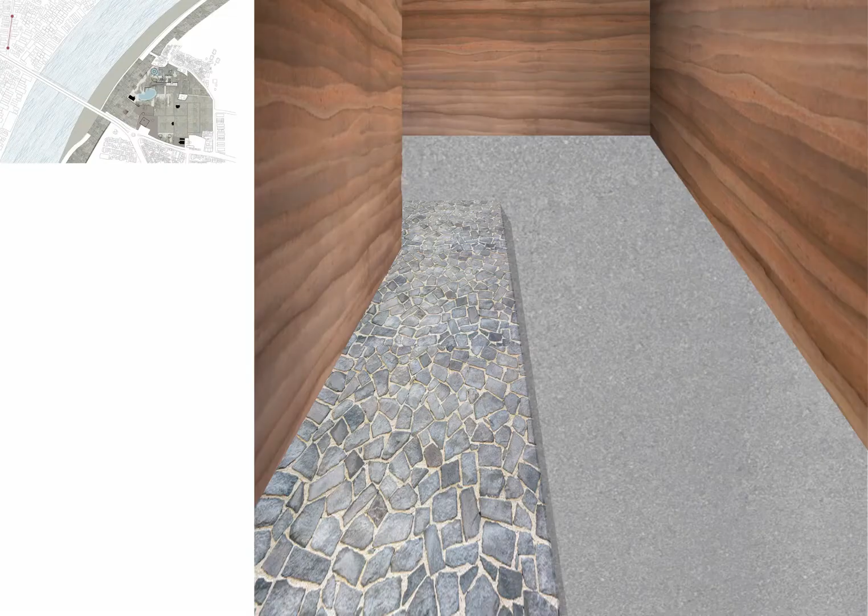After over 15 years spent traveling for my job, I decide to take a break and return to the city for good. While a lot has changed, it is great to be home with my son. After a few days of rest, I decide to accompany him for his daily morning walk and picking up fresh vegetables for the day. Between tall compound walls, he jogs along a narrow path while I take my time walking slowly.

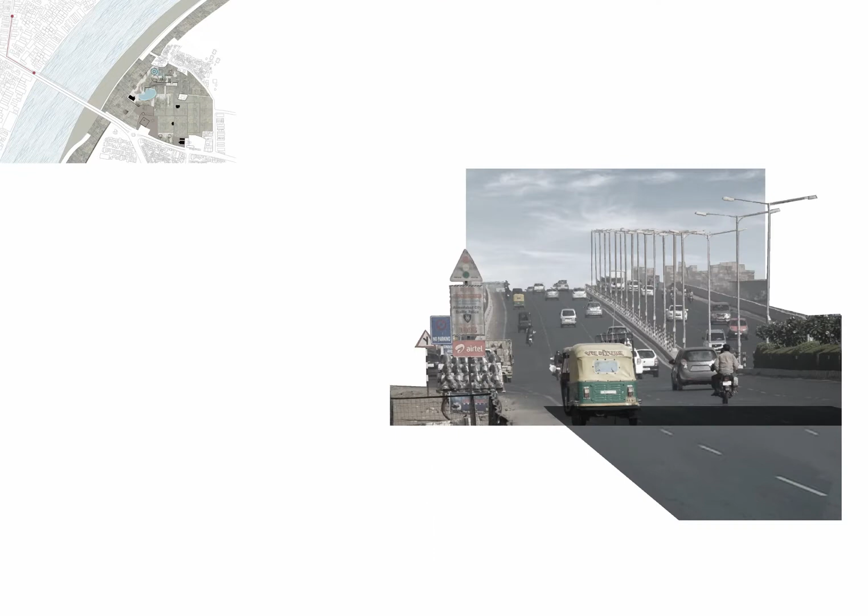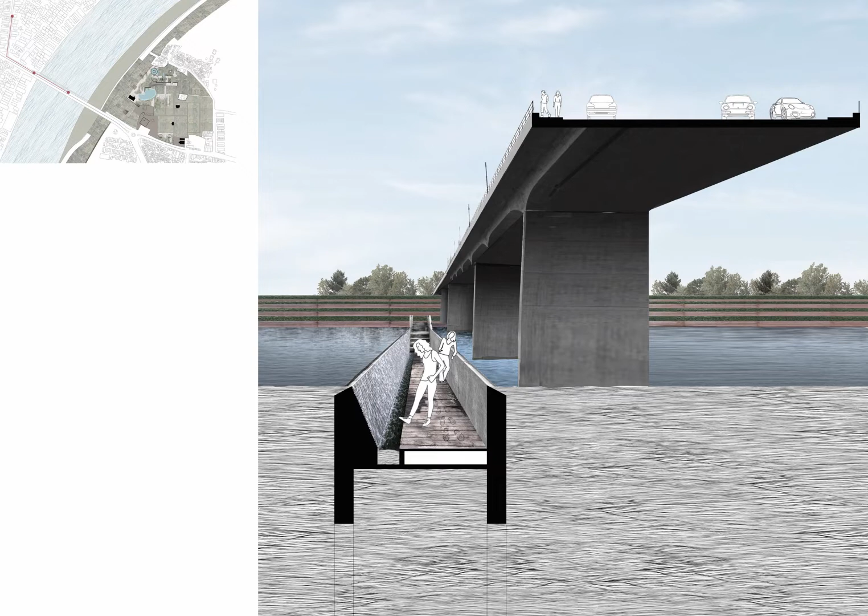The road widens and the buildings move further away, as if making way for the cloudy skies. Over the river, a bridge unlike any I have seen before reveals itself.

I descend down the staircase towards the bridge immersed into water. One side slopes down, water from the river flows and collects into a trench. I stretch my hands over the other side, my palms into the cool water. I cup them and let water trickle through, slightly parting my fingers.

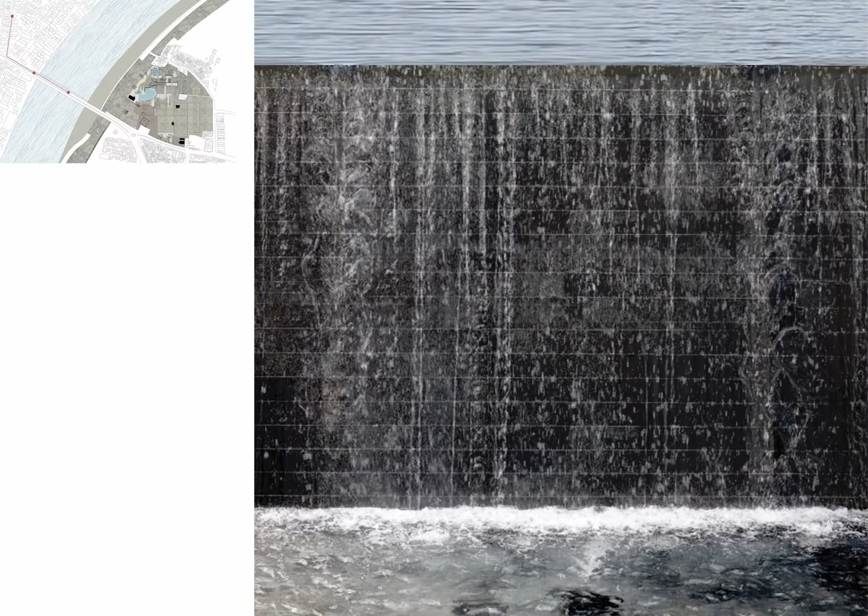As I gaze into the subtle ripples in the water, the reflections on either side look so distinct. Where I came from is a monotonous one. All buildings seem to merge into one. So many windows, and I see no people looking out. The other side has me intrigued.

Through a large field, 6 tall structures of what seem like water tanks emerge. I walk faster and closer towards the terraced field that reveals itself to be a stepped vegetable farm.

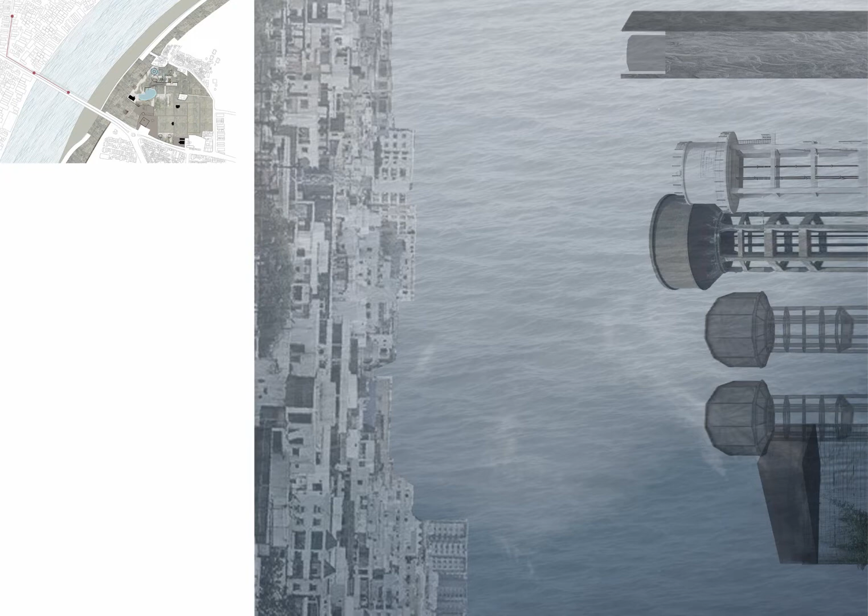Through cabbages, both red and green, I climb the farms. Jets of water from the sprinklers, hidden behind the vegetables, suddenly start to emerge, leaving cool droplets of water on my face.

Beyond the swale that divides the fields, in the far distance, buildings line the horizon, reminding me of the city within which these fields have emerged.

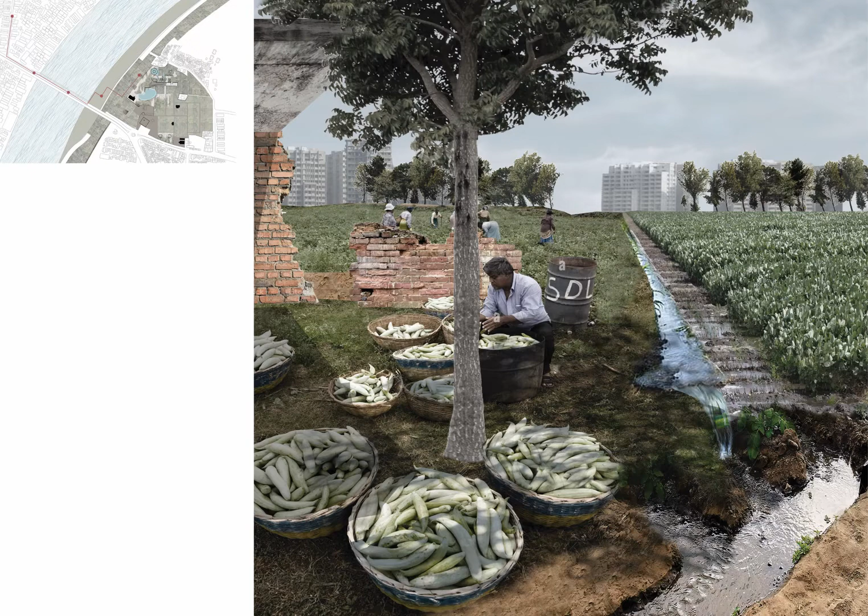I walk further to find the locals of the area collecting the vegetables ready for picking in baskets between what seem like the remnants of an old dilapidated structure.

I continue to follow a stone path towards a cluster of structures that emerge from this landscape. I am overcome by a fleeting feeling of having been here before.

Two cylindrical concrete structures are visible behind. One seems to be intact, while another with broken walls envelops a newer tall structure.

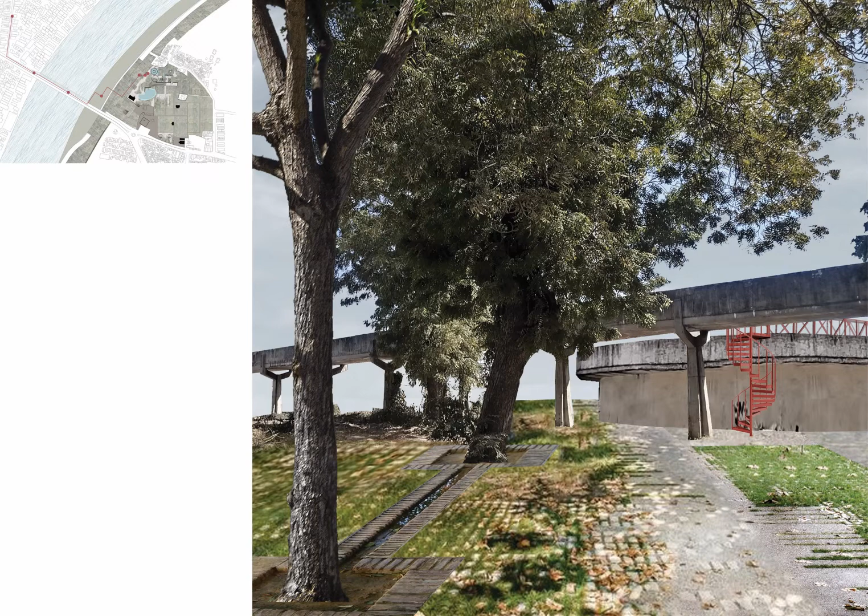As I make my way towards the red staircase of the first cylinder, the fields transform subtly into a pathway of stone and grass. Just as my curiosity about what this place is increases, I spot a group of young children huddled around a uniformed personnel from the city governing body.

He seems to be giving them a tour of the place. My son has spotted a friend and is busy chatting, leaving me to join the tour.

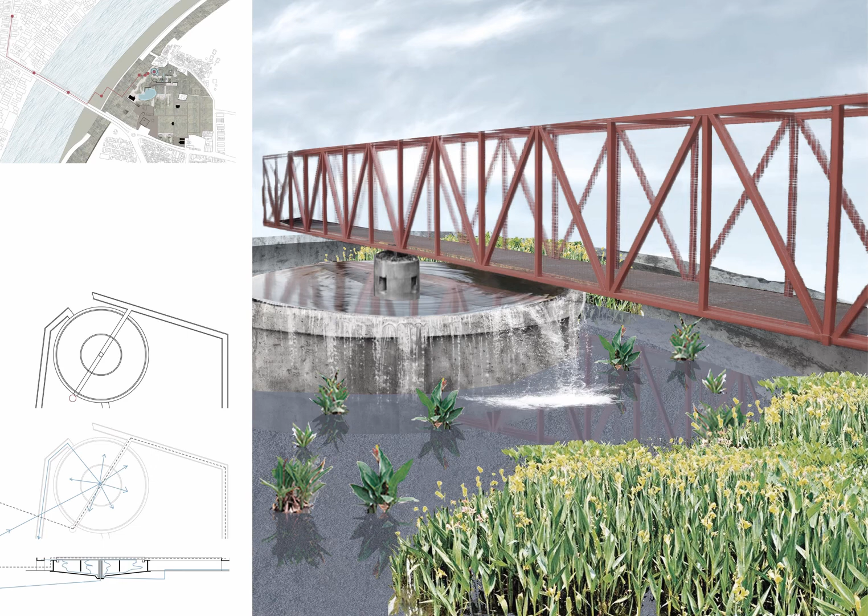The guide explains as we ascend the staircase. Earlier, this tank used to be a clariflocculator for when this site was a water treatment plant for the whole of the city. Now it does the same in a way, only now water from the river is collected through the trench in the bridge and brought here in the tank.

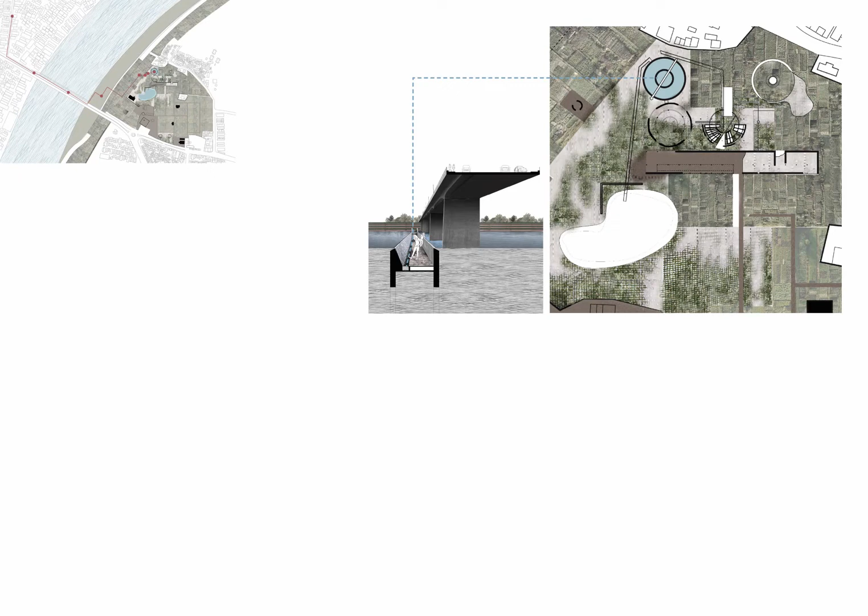Through layers of gravel, it is allowed to filter and the overflow runs through the old aqueduct and gets collected in a pond.

Before it runs through irrigation channels in the ground for watering the vegetables.

There are 4 such tanks here, but since the treatment plant was shut years ago, a lot of it was left abandoned. Some parts broke, some remained, but they all make this place what it is today.

The vegetables grown are also sold here in a market. Let me take you there, he says.

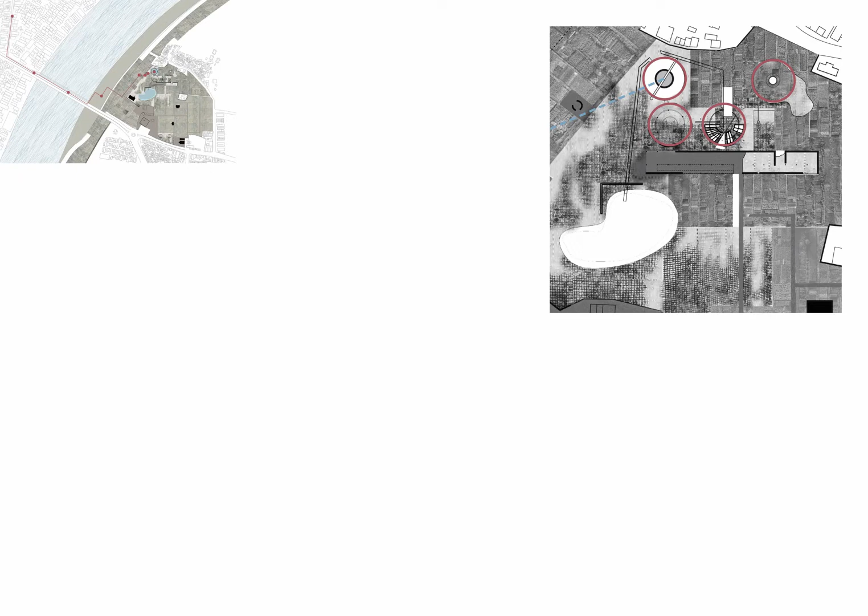The bridge on the clariflocculator ends on the old aqueduct. Part of this elevated channel has broken over time to create two separate bridges, one for the flow of water and now another for that of people.

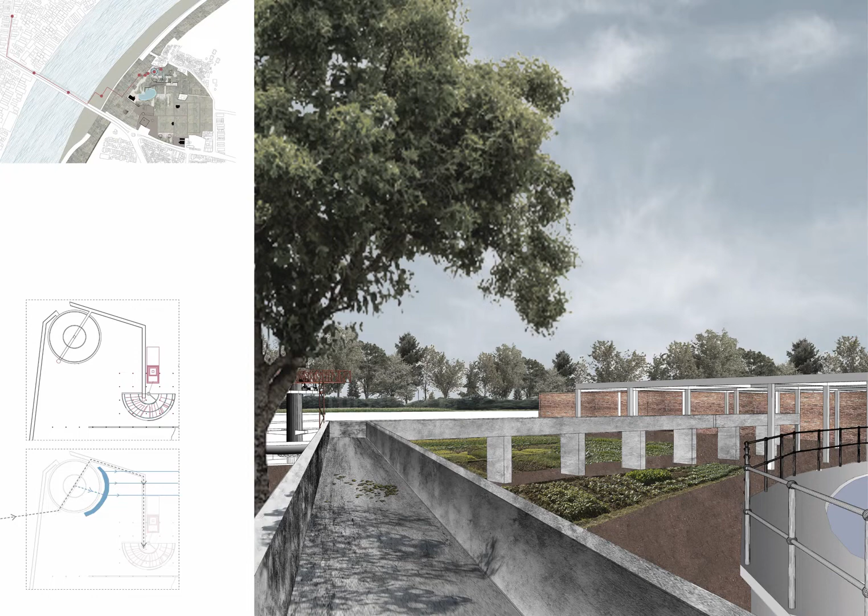I hear a chatter of people from below the fabric roofs suspended from new columns. The descent ends between two broken curved walls, suggestive of this being yet another clariflocculator. Through the old walls of crumbling moss-covered concrete, I am met with the sight of the market.

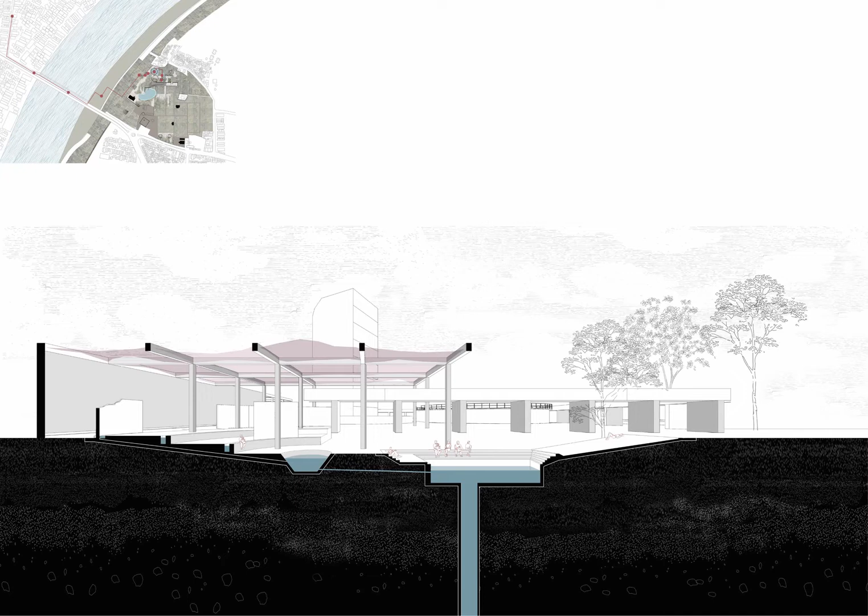Split across three levels, a thin water channel divides the spaces. I turn back to spot a small stepped water body, its edges lined with people. Under the fabric roof, shops have organized themselves. Sprinklers on the columns render the air cool and fresh.

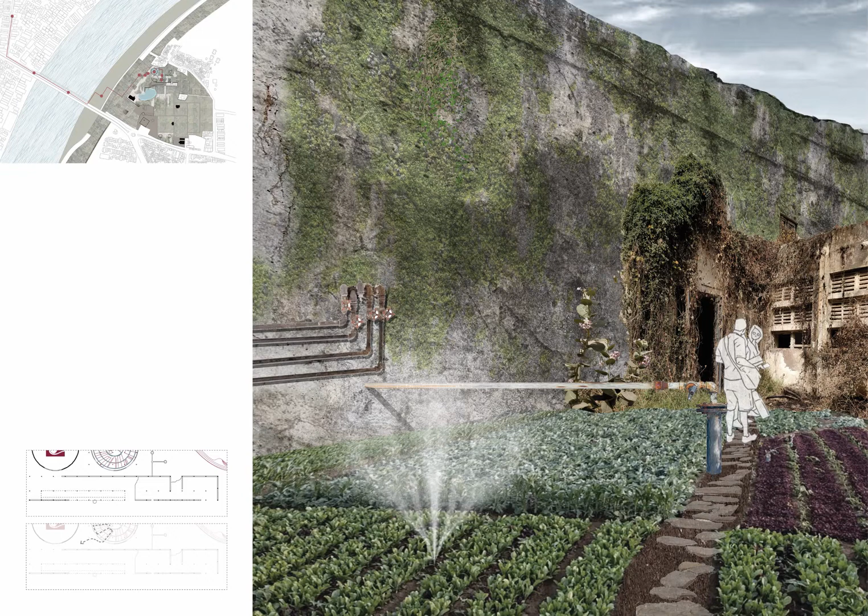I maneuver around the market for a bit and followed the guide out of the place. We approach the inside of what used to be the filtration room, now taken over by vegetation, both untamed and new.

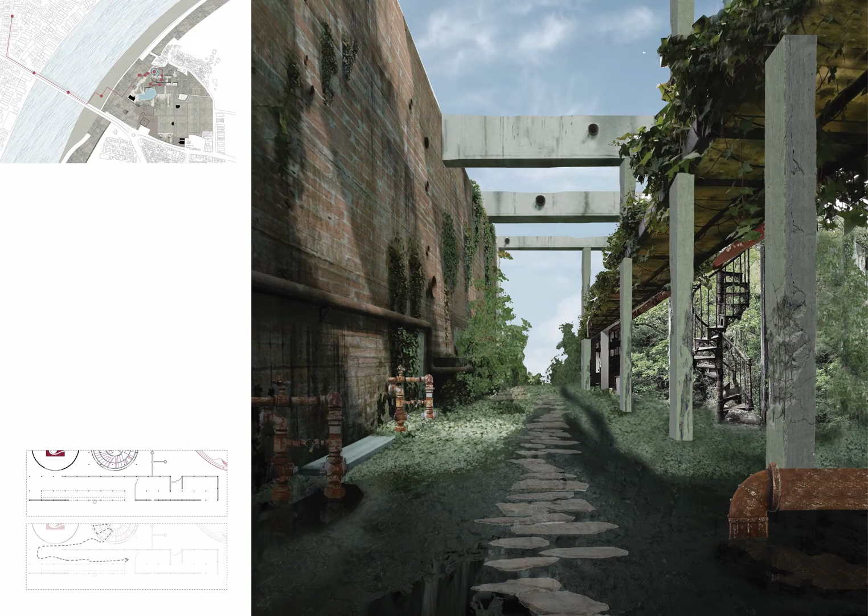All of a sudden, memories come flooding back. I am thrown back in time, walking through this space as a child with my father. I vividly remember the story he told me back then of water that stood in the tanks, flowed through the aqueduct, and got treated on filtration beds right where I stood, before it made its way into underground pipes and flowed out of sight.

I walk a little further, climbing a broken plinth. Wild plants have found homes within the cracked stone floor.

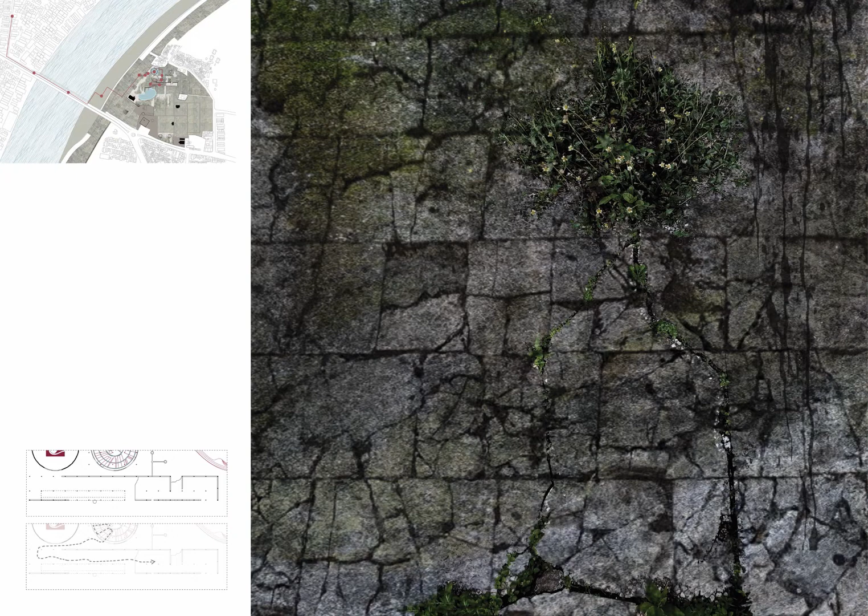In the distance, I spot a saucer-like structure hovering over the ground, with kids running around on it. The truss bridge and scraper arms stand atop the saucer, revealing that we are approaching yet another clariflocculator. Unlike the previous ones with their walls, this one is only left with its floor, and interestingly, the ground sinks in from one side and turns it into a roof to a whole big space underneath.

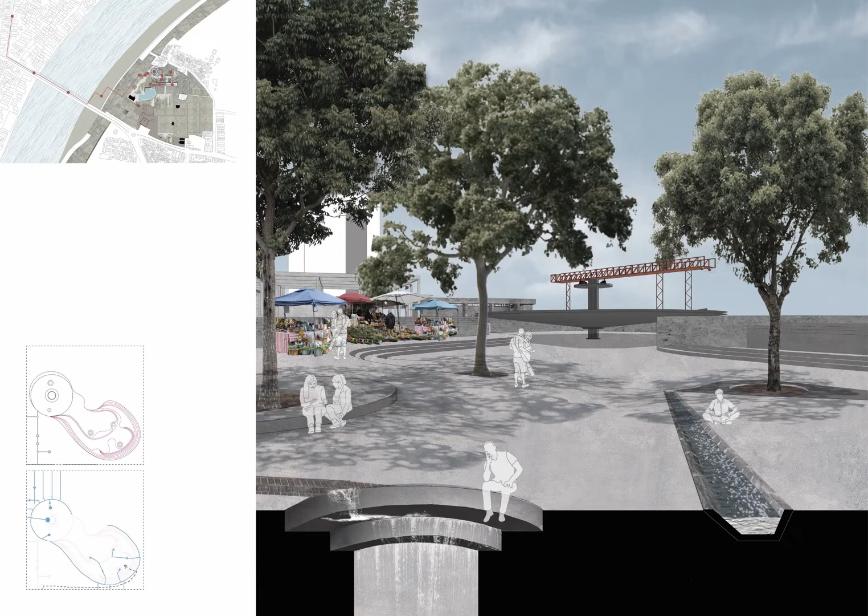The steps curve in and out, creating stepped pits for water to flow into. The channels carry the surface runoff from the fields, eventually returning it back into the ground.

The guide points to a row of stalls. These flower stalls are set up here temporarily for the mandir nearby. The rest of the day, the space is left open for either more stalls, pop-up markets, or for people to just lounge around.

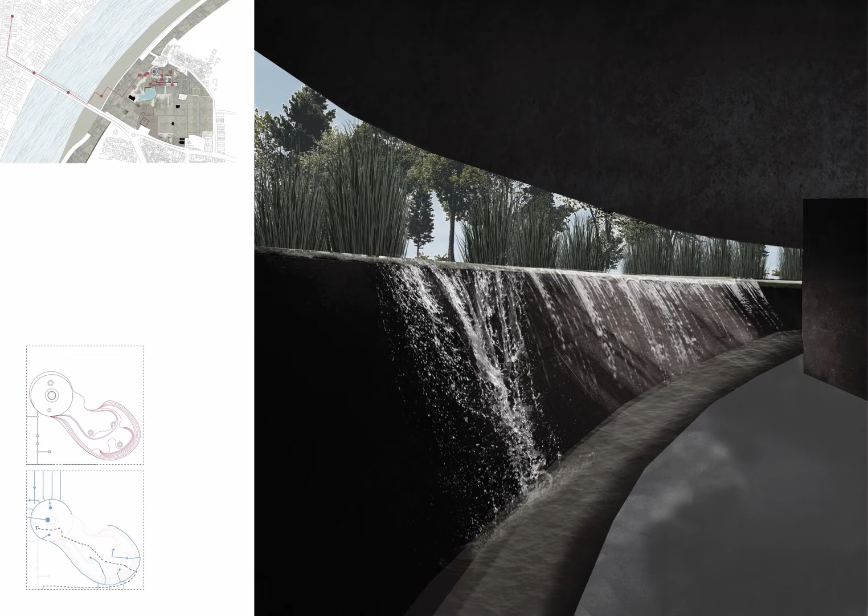As I near the underbelly of the tank, a large space carved into the earth, I hear the soft sound of trickling water. Between circular columns that hold up the slab and heaps of vibrant marigolds, people are busy making garlands.

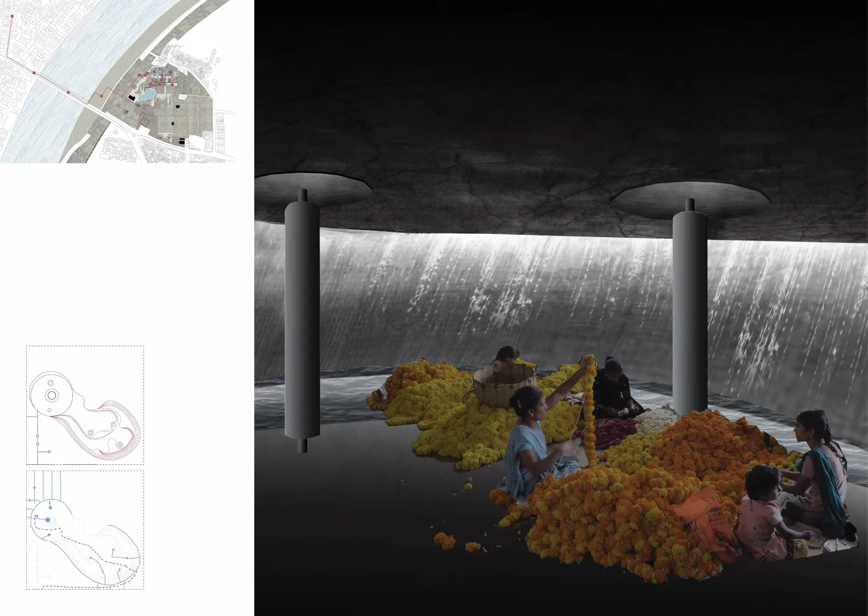I follow the guide out of the space as he points to the tall water tower we had passed earlier. This tank is standing on the location of the last clariflocculator, he says.

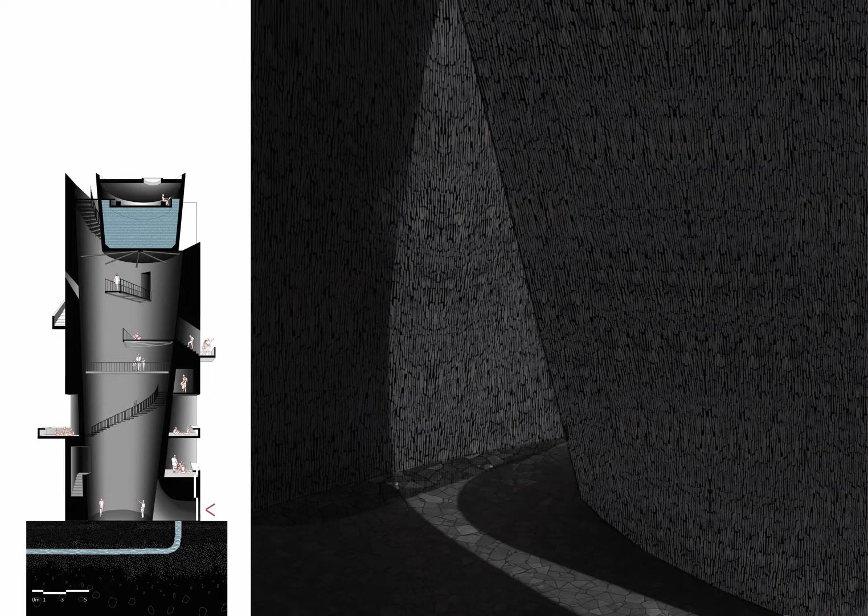We enter into a dark tunnel of sorts. The high walls on the inside curve and taper outwards as it goes higher, housing a large water tank under which I stand. I catch glimpses of the blue sky through the visual labyrinth.

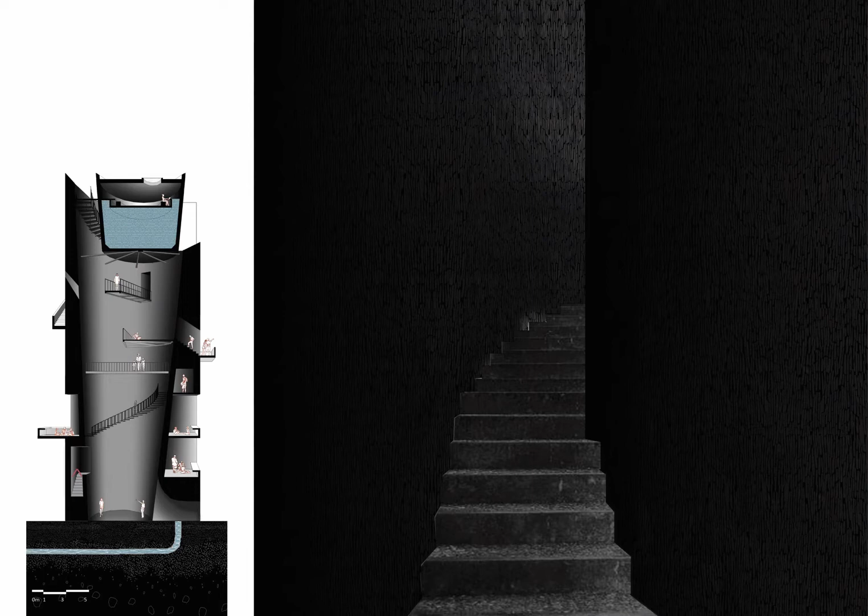My son rejoins me at the right time as we head towards a door. The circular wall opens up, a winding staircase within. Niches carved out of external surfaces create shaded pockets to sit, meet, read, and work.

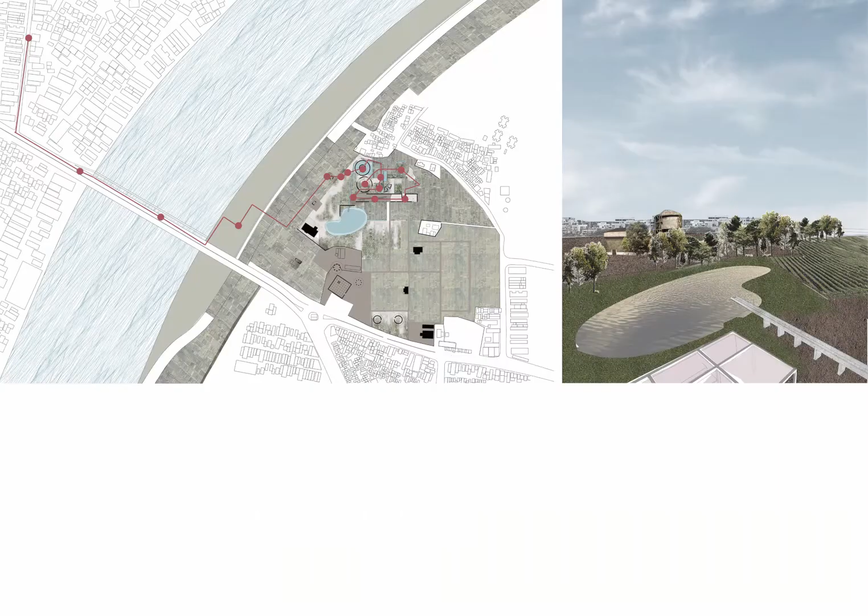I climb higher. The staircase leads right inside the tank. I duck down, surrounded by a ring of water, an elliptical skylight bringing light in. I blink my eyes as we emerge out and atop the tank.

A pond stands out as a golden body. I spot what seems to be the aqueduct we saw in the very first tank. The guide's voice confirms the same. The overflow gets collected here and becomes this large pond, he says.

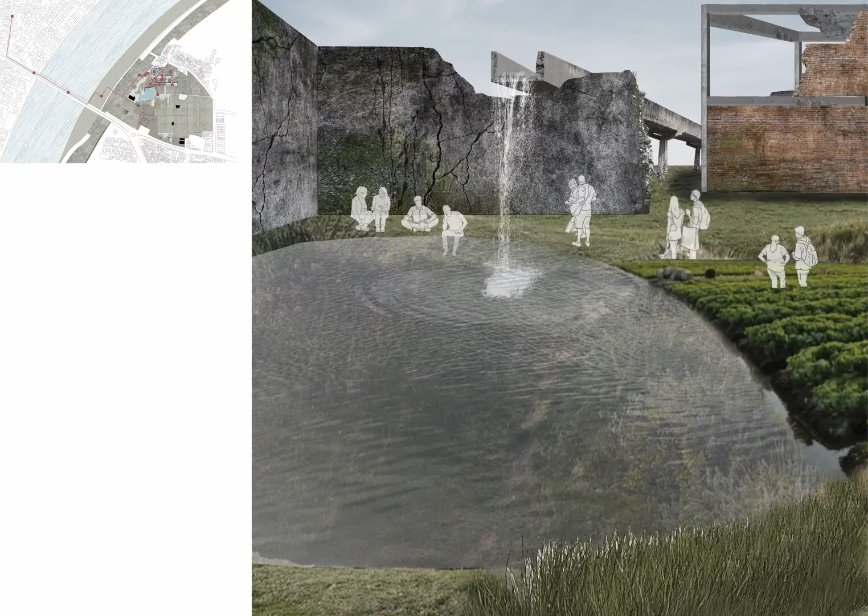I see people sitting around and descend down to make my way to this golden water body. We sit at the edge of the pond, feet dipped in lukewarm water.

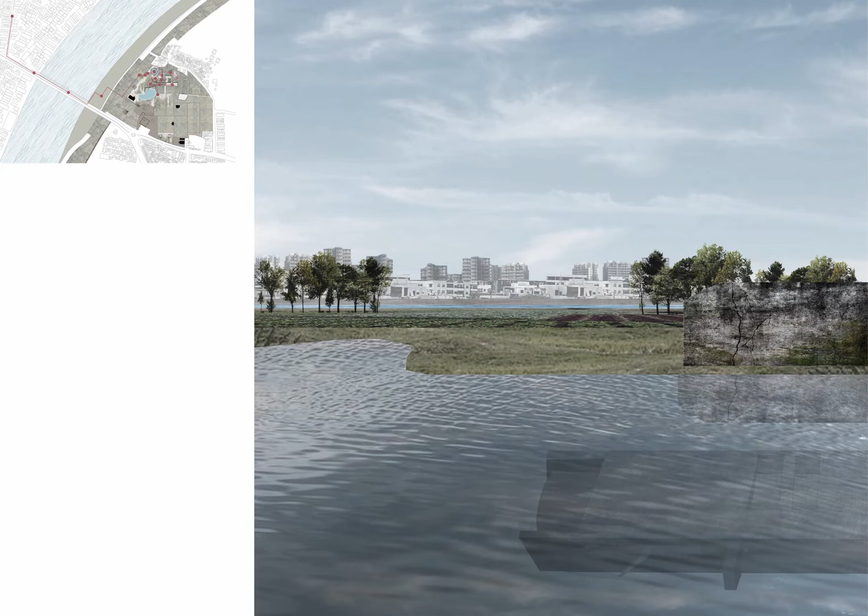Like in the river and the two distinct reflections, I am reminded again of what seems like two cities. In the backdrop, I spot the bridge over the sliver of the river, the one that will take us back to the city of cars, buildings, and empty windows. But tomorrow, it will bring me back to the small city of tanks, farms, ponds, and people.